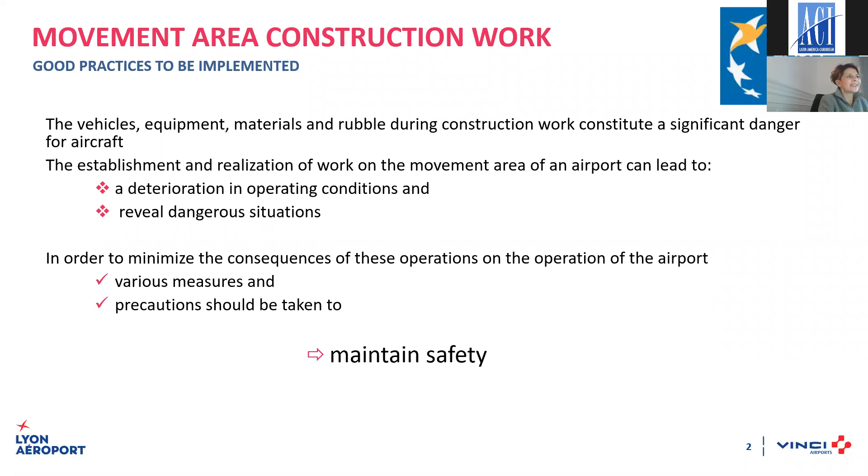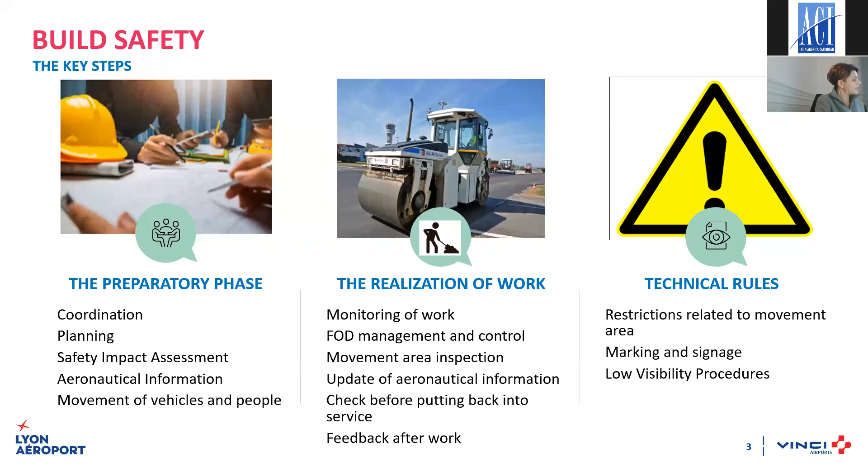So to build safety, it's the next slide. Thank you. To build safety, we identify different key steps. The first one is the preparatory phase, the realization of work, and taking into account technical rules that we can start to see in detail on the next slides.

Preparatory phase and good practices. The first step is the coordination. Good coordination between organizations upstream of the work is necessary when work impacts the operation of the airport and the working methods of the air navigation service provider. This coordination facilitates the processing of the safety file by the supervisory authority. Coordination is based on notification, monitoring, and acceptance of the work by the safety manager, also for routine maintenance operations, and the authority. Coordination between the airport operator and the air navigation service provider.

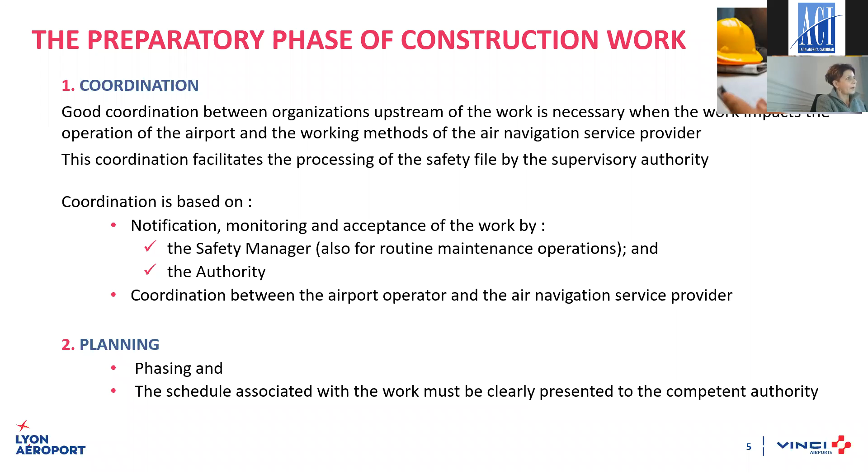The second step is the planning: the phasing and schedule associated with the work must be clearly presented to the competent authority. Then, the safety study demonstrates the knowledge and control of the impact on safety. It must be conclusive on the acceptability or not of the identified risks with regard to the risk reduction measures proposed, and decisive on the implementation or not of the change in view of the conclusion of the safety study, including especially the feared events of greatest concern.

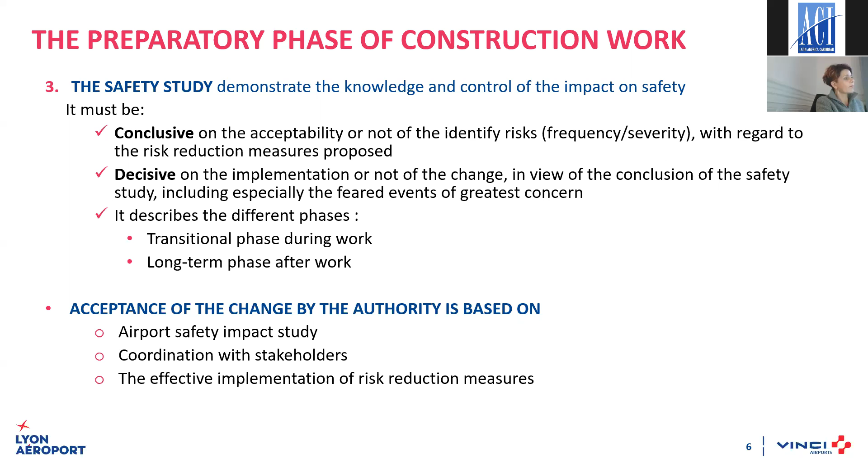It describes the different phases during works and after works. The acceptance of the change by the authority is based on the airport safety impact study, coordination with stakeholders, and the effective implementation of risk reduction measures. You can turn the slide. Thank you.

At Lyon, we have to observe at least 2 months before to send the notification for approval to the authority before starting anything. Sometimes it's very complicated. And for the air navigation, it's at least 4 months before.

We also have the aeronautical information to take care of. At Lyon, we are subject to EASA regulation, and we are the aeronautical data provider who creates or requests the creation of aeronautical information concerning the airport. Compliance with the coordination protocol must be rigorous to ensure real-time accuracy, particularly in the following cases: the work affects the approach and landing instruments, the work modifies the declared runway length and/or distances, in the event of a total closure of a runway or taxiway, or when setting up a temporary offset threshold.

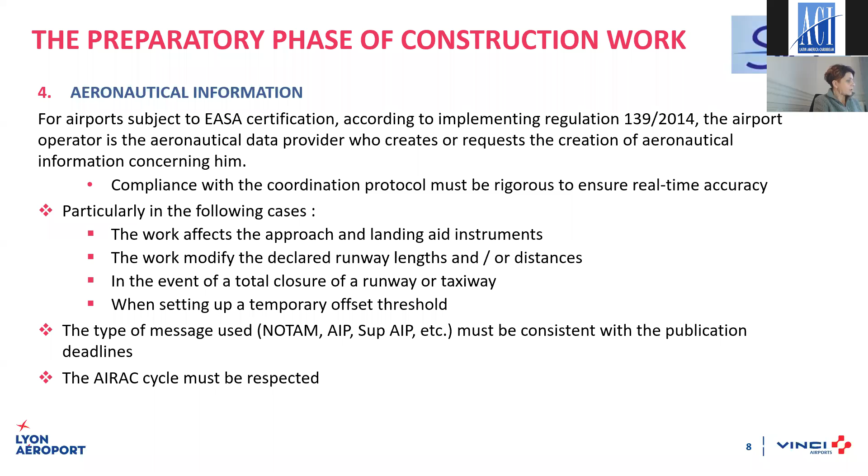The type of messages used, NOTAM, AIP, etc., must be consistent with the publication deadline, and then the AIRAC cycle must be respected. It's around 3 months.

We also take care of the movement of vehicles and personnel, and we implement different access controls. The first one, access control for vehicles and personnel, to prevent, of course, any unauthorized entry to the airport platform. The access permits are to be anticipated and planned before work. We implement access to the work area, also traffic rules on the ground and communication.

Staff are trained to drive airside and receive permission, on vehicle traffic rules on the apron and maneuvering area, and on communication between the driver and the air navigation service provider. Otherwise, they must be accompanied at all times by qualified personnel. And for parking areas and vehicle use, we have mapping. Mapping is developed to limit access to defined areas that are reported and marked.

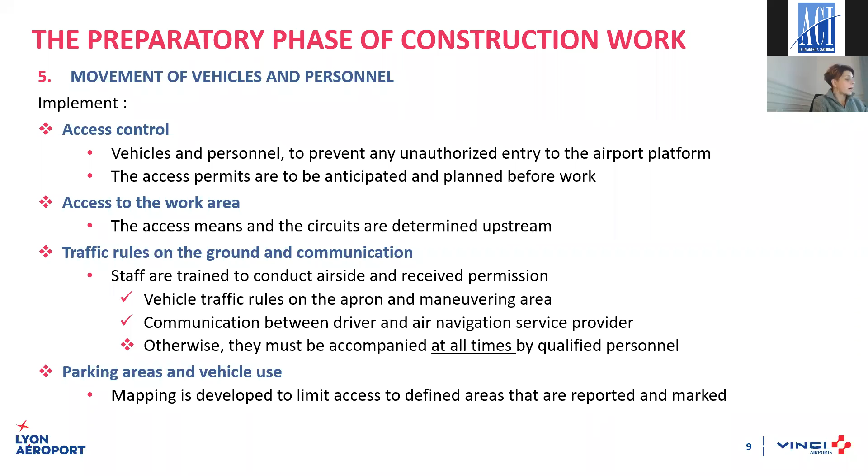This was the first part regarding the preparation, and the second step is the realization of work. During this step, we start with the monitoring of work. The airport operator is responsible at Lyon Airport for the smooth running of the work for which it is responsible.

We ensure regular inspection of the progress of work, check that the safety measures, procedures and standards are respected, and in the event of an incident regarding degradation of infrastructure or equipment, we have to immediately report to the department concerned for the implementation of corrective measures and notify it to the authority.

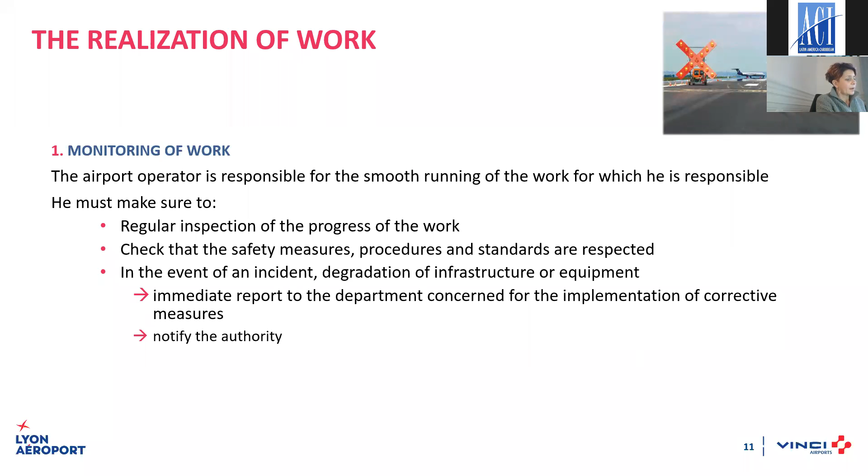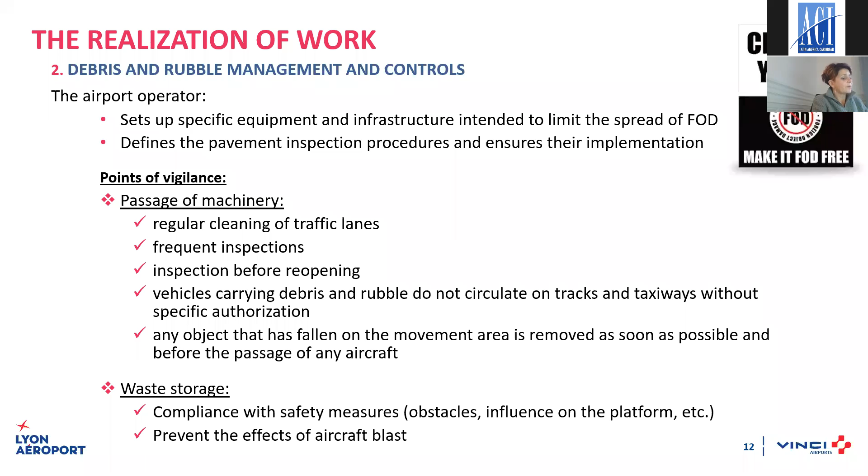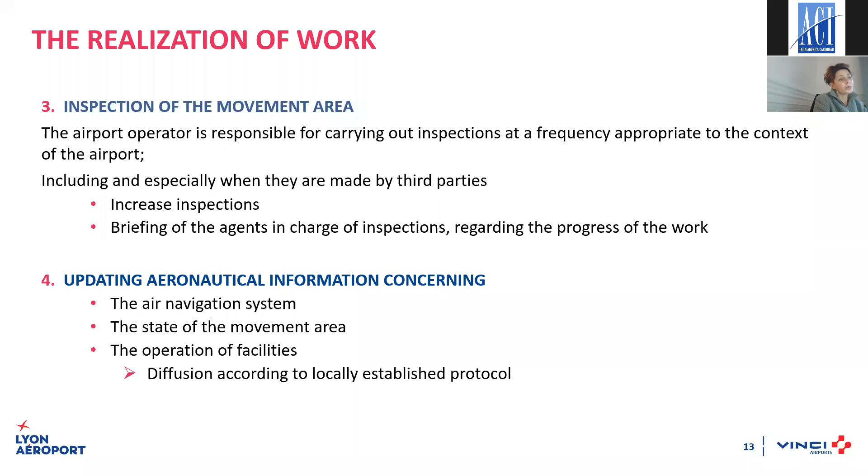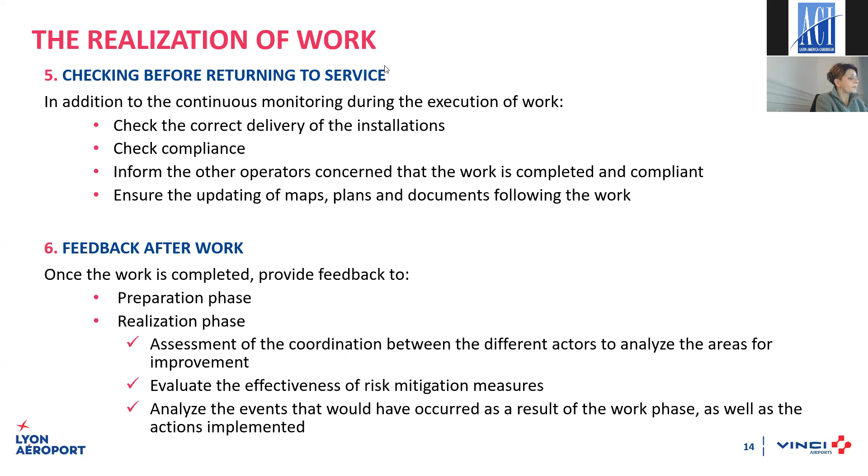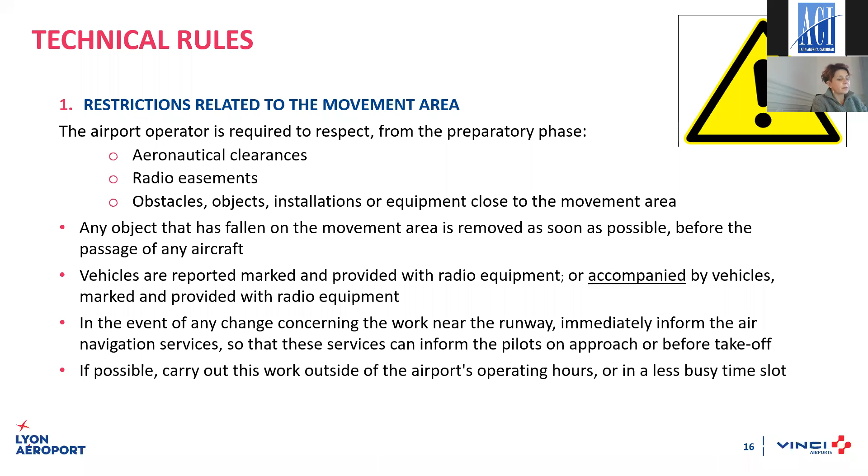In the event of any change concerning the work near the runway, immediately inform the air navigation service so that the services can inform the pilots on approach or before takeoff. If possible, carry out this work outside of the airport's operating hours or in a less busy time slot. Marking and signaling: the signaling of the work zone by way of marking and signage is an important point to consider when carrying out the work. Prohibition signs, barriers, lights on unusable areas.

I think it's not the right slide on the screen. Yes. We should be at page 17. Sorry, number 17. Thank you. Perfect. Yes, it's my fault. It's the right slide. Thank you.

So, work near the end of the runway. Check that no machine, material, or storage of rubble pierces the landing and takeoff surfaces. Respect the marking and signage instructions. Update aeronautical information. During work near traffic lanes, strictly respect the regulatory distances.

During work near air navigation aids, compliance with radio easements, meteorological equipment and visual aids. Evaluate the impact of the work on the proper functioning of these aids. And in the event of a temporary displaced threshold or runway reduction, stop or adapt visual aids to avoid any false indication.

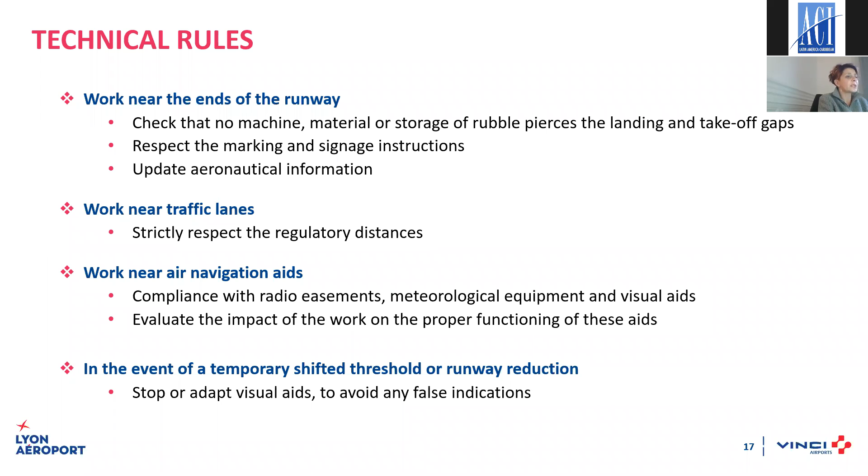During low visibility conditions, limit movement on the ground as much as possible. Clear sensitive and critical areas of the ILS. Stop all construction works. Clear the maneuvering area of any personnel, material, vehicles, or equipment related to the work, and do not carry out any work on the electrical circuit.

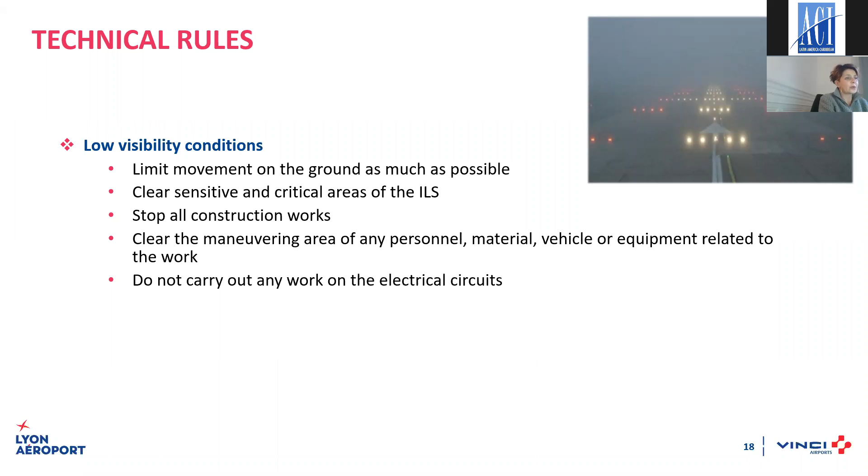Regarding marking and signaling, the signaling of the work zone by way of marking and signage is an important point to consider when carrying out the work: prohibition signs, barriers, lights in unusable areas at main intersections.

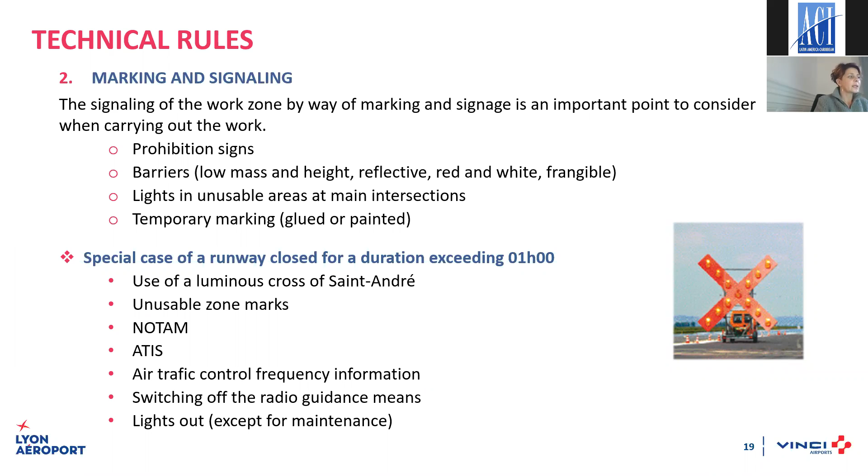Temporary marking, like glued or paint. A special case is a runway closed for a duration exceeding 1 hour, where we have to use a luminous cross of Saint-André, unusable zone marks, NOTAMs, ATIS, air traffic control frequency information, switching off the radio guidance means, and lights out, except for maintenance.

It's the end of this presentation. I would like to thank you, and I will be glad to answer your questions at the end. Thank you.

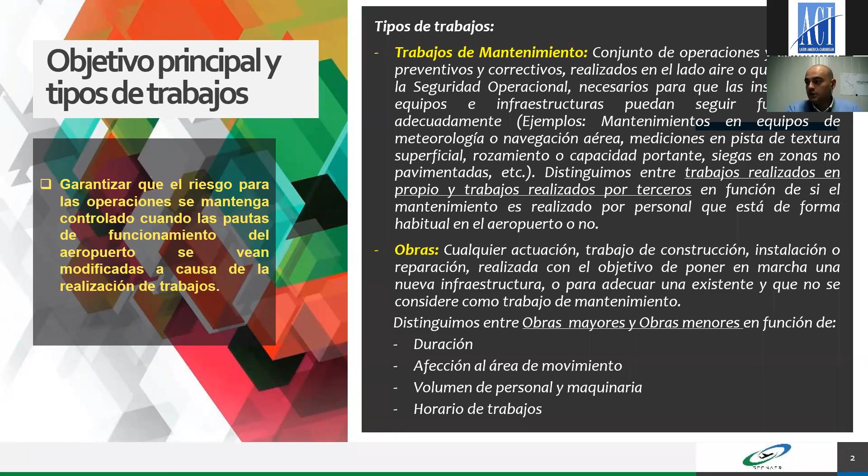On the other hand, we have the other group of works: construction works, installations, repairs, in order to run infrastructure or adapt current infrastructure, which is not considered maintenance. So in these works, we have major and minor works depending on the volume of personnel and machinery involved and the schedules they're carried out.

The main document for operational safety during the works, we call it the Surveillance Operational Safety Plan. This is the document that establishes the acceptable means for complying with the requirements that must be guaranteed when we carry out work on the airside or that affects operational safety at the airports.

The main demanded requirements contemplated in the Surveillance Operational Safety Plan are locating the works and how we access them, possible problems to operational safety, radio communications to be used, and possible incidents that could happen during the work.

The training to personnel that would be working at the airport, a series of KPI indicators, operational safety indicators to measure performance of the works with operational safety, and how we control external operators or possible outsourcing, how we ensure proper follow-up of operational safety and requirements for persons responsible for all this follow-up.

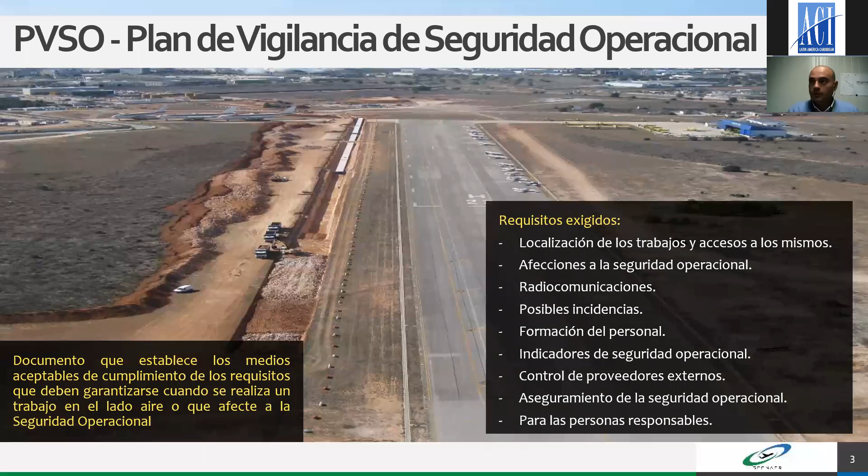The possible incidents are: we need to remove obstacles on the runways or critical and sensitive areas, or we might have foreign elements. Possible problems also on the runways, or we must look into possible problems within meteorological areas or at the taxiways of the airlines.

Possible problems in fuel areas or maneuvers of aircraft during the scale times. We must also take measures to carry out works with adverse meteorological conditions or low visibility. We also revise whether the work can affect a specific facility. Taking into account these possible problems, we determine whether we need to do notification. This is how we handle operational safety during maintenance work and how we revise possible problems that they could cause.

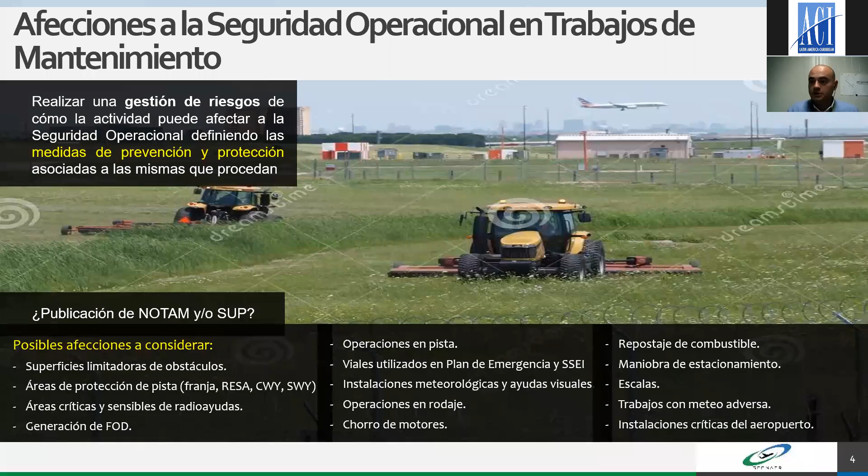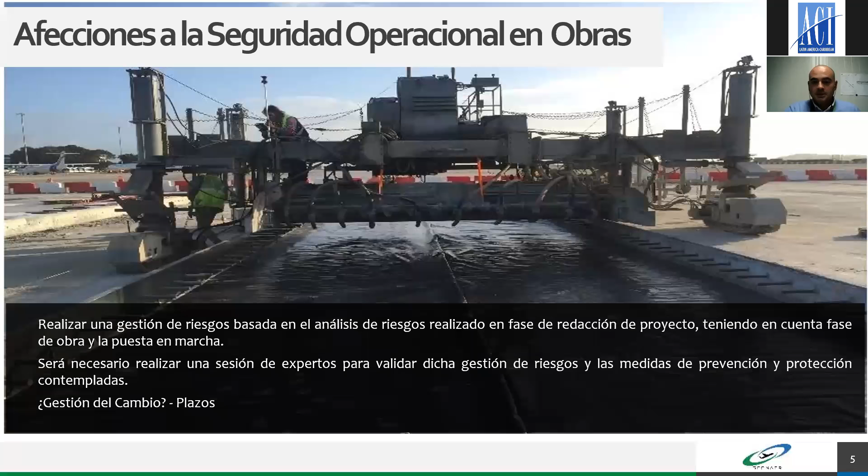During risk management, we need to discuss this with experts to make sure that prevention and protection measures contemplated in our risk management are proper and acceptable to everyone. Another aspect to take into account to manage possible problems during works is we need to be ready for changes, and if we need changes, we need to be authorized by our aeronautical authorities. I think Monia mentioned this in a previous webinar, so I will not delve too long on this, so we go on to the next slide.

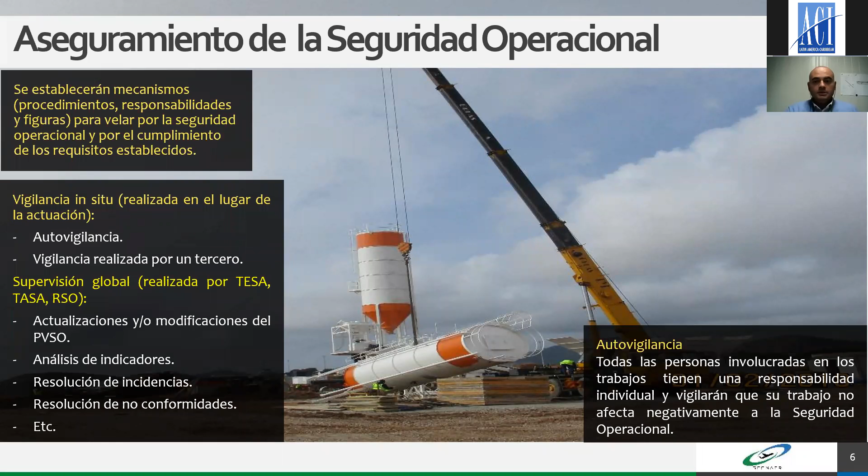In the case of maintenance works, the way to ensure operational safety will be through surveillance on site with auto surveillance. We have a checklist to make sure that we have followed all proper measures in every zone or area. And in regard to global supervision and maintenance work, the person in charge of operational safety is in charge of this, and people at the airports must do the global supervision.

And additionally, we can have supervisions according to operational safety aspects.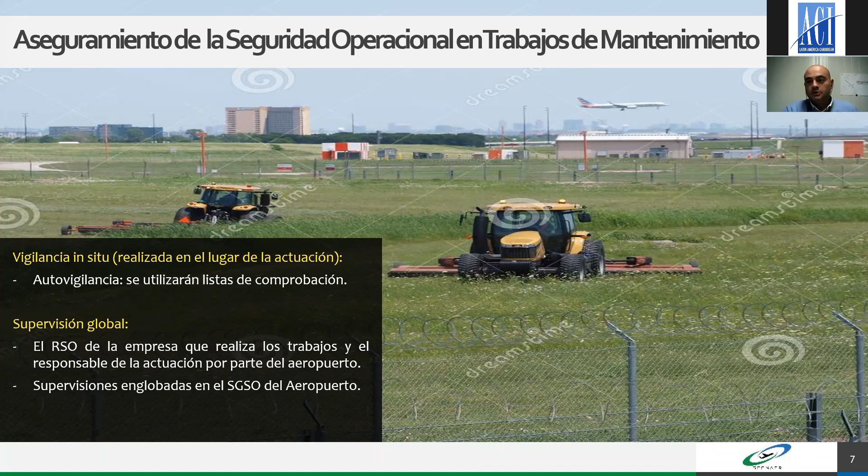In the case of major works, ensuring operational safety is done differently. In this case, on site, we have auto surveillance done by each one of the persons that is working. Additionally, the supervision from the person in charge of aeronautical safety, who must follow up on operational safety by the outsourced company in charge of the works.

We must also take into account elaborating the surveillance operational safety plan to establish a revision plan with a calendar of visits to the works and to test the aspects we must monitor or surveil in each area. Additionally, we also carry out surveillance by a third party.

In this case, the third party is, what in South America we call interventors. In Spain, we call them technical assistances of work controls. We appoint an auditor who audits this work, and we also avail an inspection program for the work that will be done by this TASA institution.

In regard to global supervision, they look into all documents, and all major works are carried out by TESA and TASA and responsible parties at the airport. And additionally, like with maintenance, there could be global supervision with operational safety at the airport.

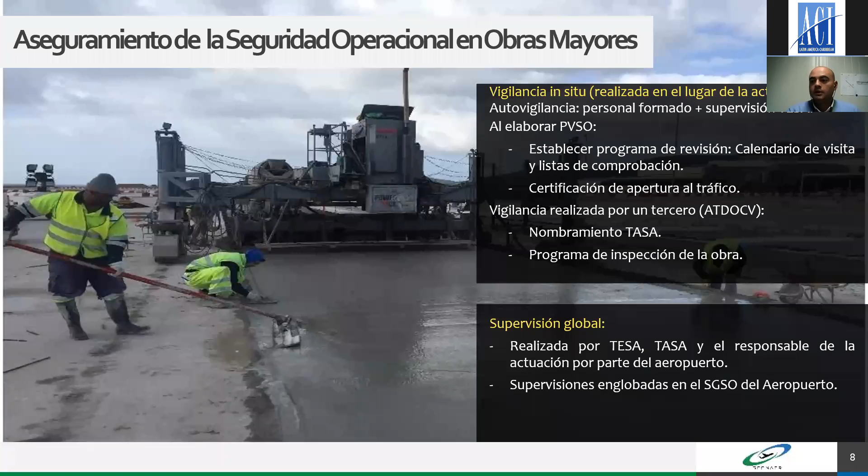In the case of minor works, to ensure the quality, the surveillance is done on site, in this case by trained staff in TESA. In general, it's fairly similar to major works, but the difference is that in this case, we don't usually have supervision with a third party. And if there is, it's normally from the airport and not an external engineering company.

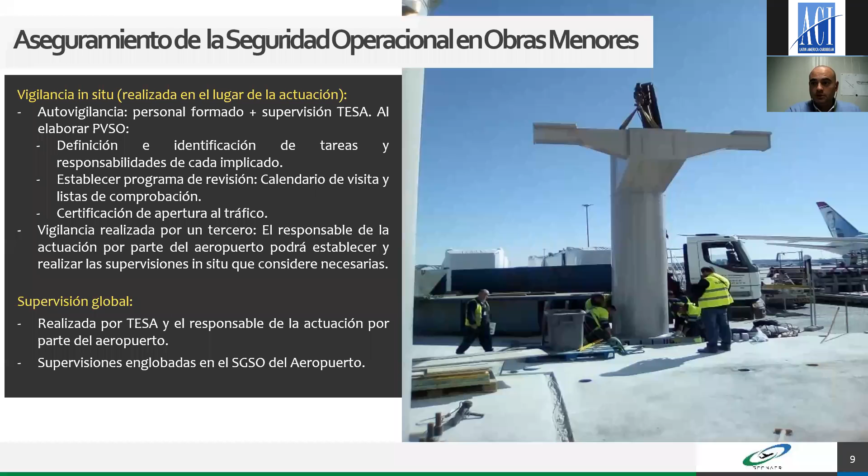We will also have global supervision. In this case, it's done by TESA and by the responsible person at the airport. And it's also possible that there are global supervisions and operational safety supervision of the process.

In this slide, I explain the requirements of the responsible persons for operational safety and what are the responsibilities of each one of them. In the case of maintenance works, the main figures here are the airport operator with the external actors. This is a person that belongs to the airport who's assigned to follow up on the activities that the external person will do in the airport and to make sure all operational safety requirements are complied with. The other important figure in maintenance work is responsible for operational safety. It's a person that belongs to the external consultant, and they will make sure of operational safety aspects, and they will be involved in the communications aspects. And in case of the works, the responsible persons and responsibilities are different.

The responsible for operational safety in this case is TESA. It will be a technical person from the construction company, previously approved by the director of the airport. He will have full authority on the personnel or staff. If there's an event, he can stop work immediately. To be appointed technical person for operational safety, you must count with aeronautical experience. Once the work is being developed, he must be available at all times, and depending on the work, he must be at the airport every day.

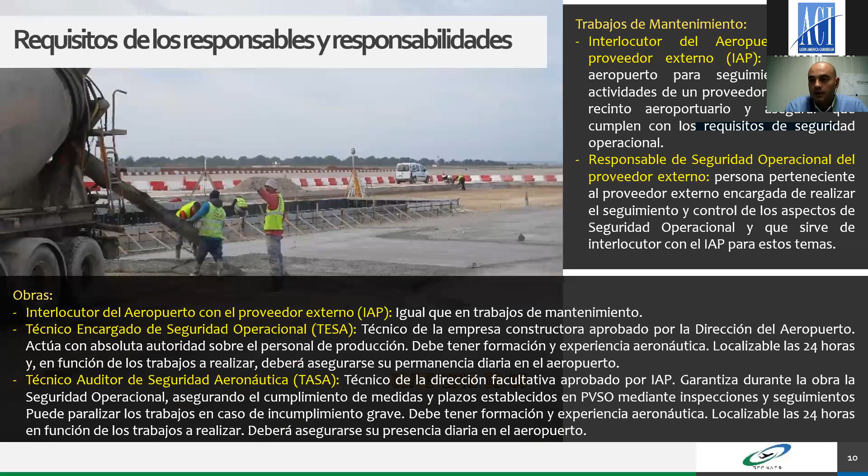Well, thank you, that's my presentation. Thank you very much for your attention. It'll be a pleasure to respond to any questions you want to ask. Thank you.

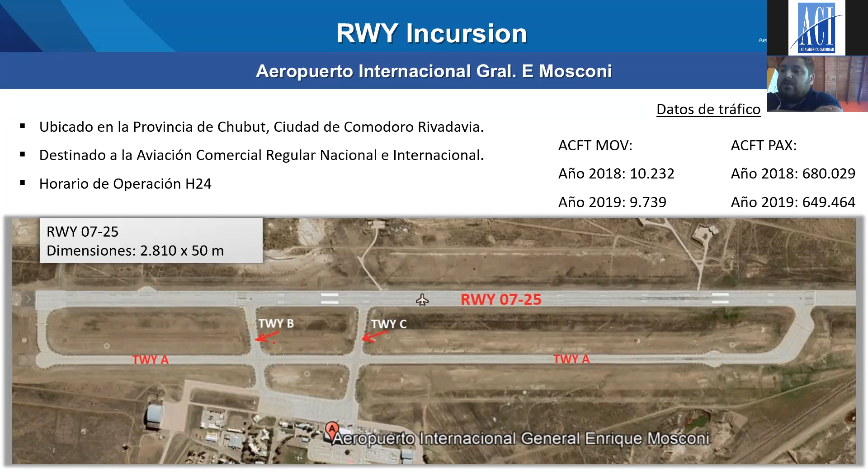Together with the aeronautical works, we developed work stages, 7 stages actually. The first one included displacement of the threshold. It has an orientation of 07-25. The threshold would be displaced by 750 meters, so we could work on the 07 runway, and then adjust the Alpha taxiway to be used as the runway.

The idea to keep the airport in operation was that, while we were repaving the main runway, we could use the taxiway as a runway during the works. The main runway has 50 meters in width; the taxiway width is 40 meters. To be able to use this taxiway as a runway, the first thing we saw was that the friction of the surface was at the limit of what was acceptable. Thereby, in order to improve the operational standard, we decided to... all the surface is concrete.

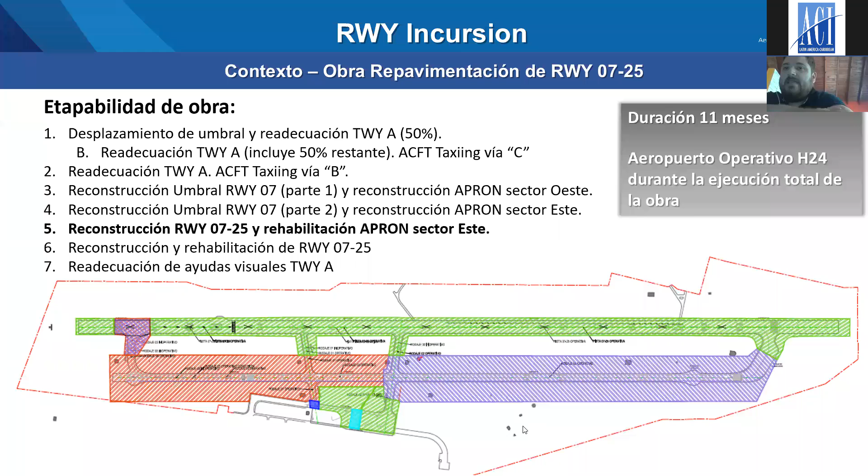This work took approximately 11 months; we started in the first days of January to end at the end of December. Duration 11 months, January to December. We took additional measures here. We issued operational safety bulletins. We used the example of the airport of Montevideo, Uruguay, and we adapted their work methodology. And we started to produce these bulletins and sent them to the airlines.

In the first stage, this is what you see here, the first bulletin. You can see in the pinkish area where the areas are penalized at the airport. The objective of this bulletin is to inform pilots and airlines in a simple and quick manner how the movement area of the airport is configured. The truth is, we found this to be a very useful tool, and the airlines received it with open arms. It's very useful for the pilots since they immediately understand how the airport is configured.

What you see here is stage one. As I said, about half of the Alpha taxiway was penalized, and we started using the 07 taxiway. You can see here in white, after threshold 07, a security area we left as a buffer between the aircraft and the work area.

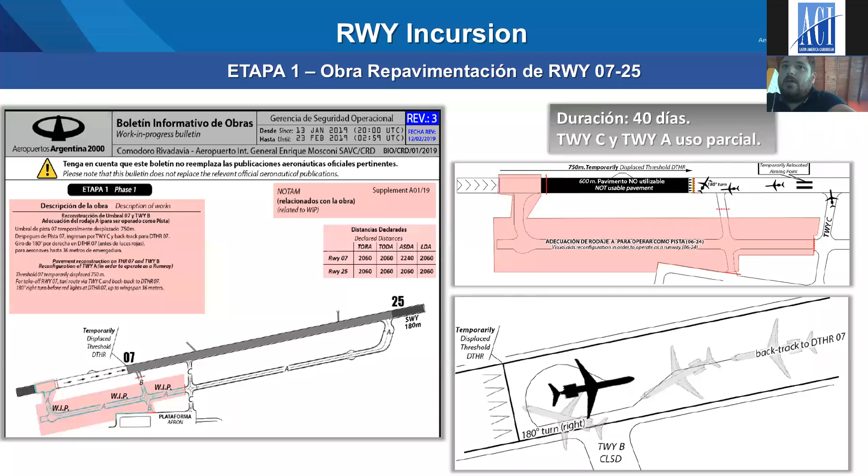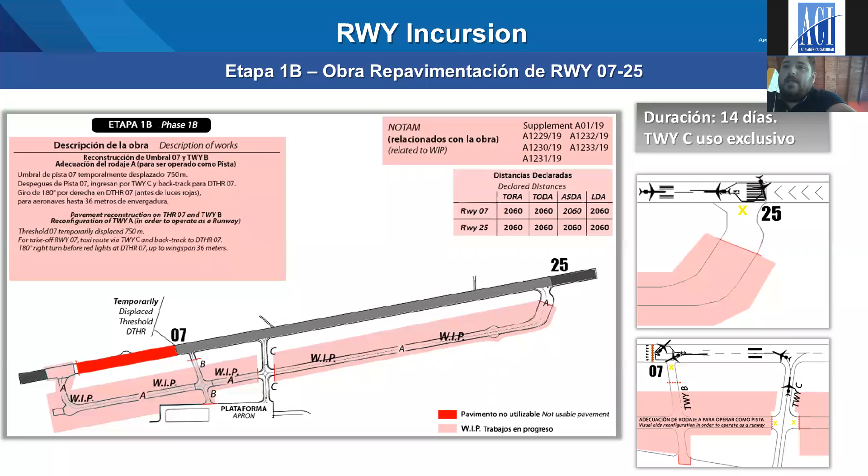In the second stage, we started to work on the second half of the Alpha taxiway, enabling only Charlie so airlines could land. In the second stage, we enabled Bravo so it could be used together with the runway. You see a part in red, which is the security area between the beginning of threshold 07 and runway 25. We had to mark it red because of some events we had, which I will mention later on.

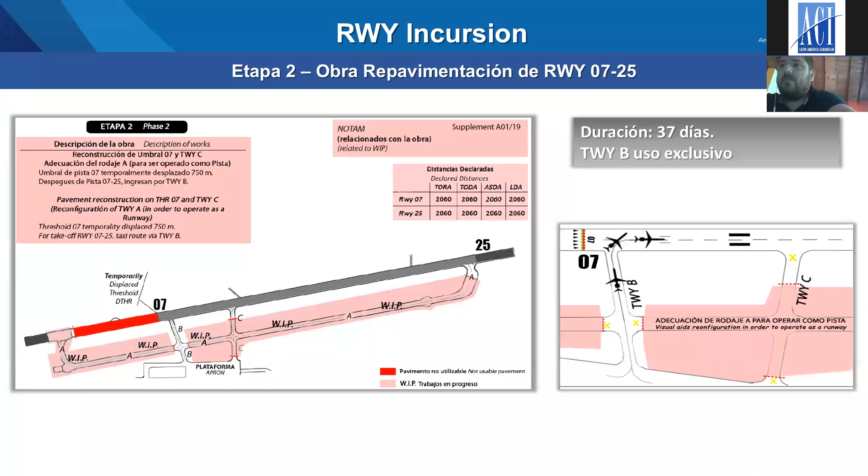In this stage, you can see we started to have a sort of overlapping of work. The original idea was that the works would not affect more than one subsystem of the movement area of the airport. So we had to attack one part of the runway, the taxiway, and then go to the apron in two sectors, and once we finished with the apron, the runway. But the reality is that we could not comply with the timeframes for different reasons. The stages overlapped with each other, and while we were working on the runway, we were also working on the apron.

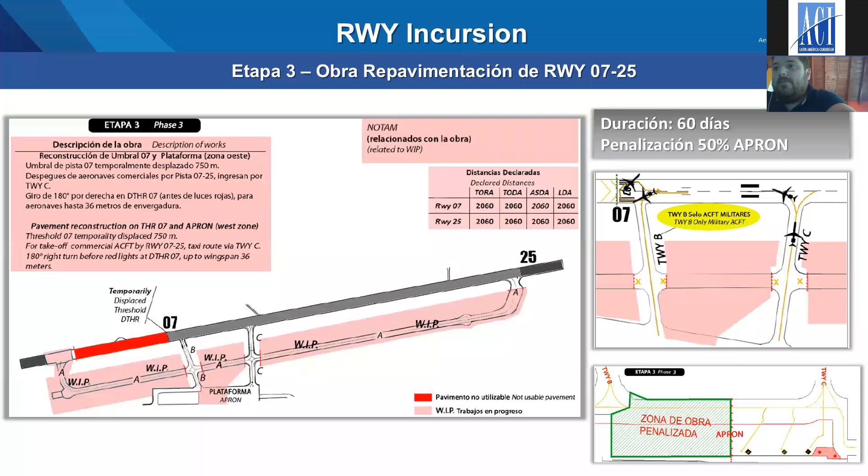Here, in this stage, we continued working in the taxiway. We had attacked work in the other half of the apron, always being careful with security in the operation, which was in operation always.

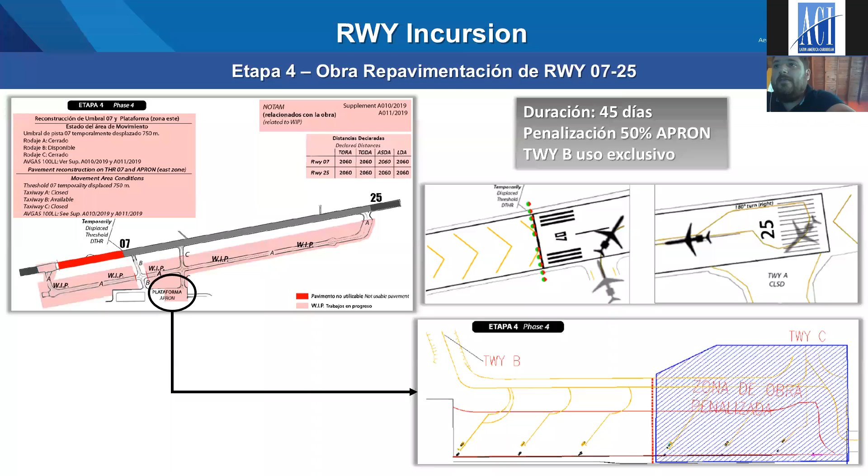Here, in this fifth stage, we started with repaving of the runway, and we started to use the parallel taxiway as a runway. We emphasized here a lot that runway 07-25 was closed. In this bulletin, very briefly, you can see the operational conditions of the airport. This information, although it's not official, is produced by the aerodrome operator in Argentina. The official information is done by civil aviation.

We understood that this tool was very useful, though, to better inform the pilots, so the pilots would have more information about the movement areas, and so we could prevent approximations to runways that were closed or to work areas where aircraft should not come close.

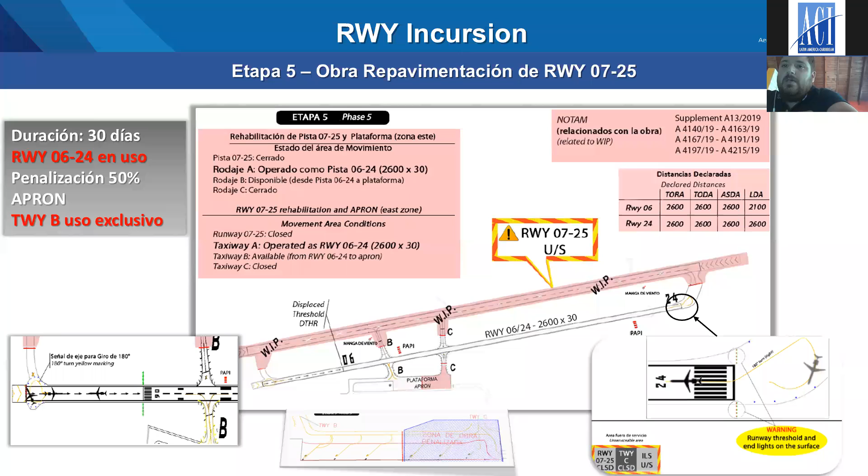After this, in stage 6, readaptation or readjustment of the runway, we started to produce new visual aids on runway 07-25. We always kept the runway closed. Besides the NOTAMs, we included the white crosses for closing the runway. We also included them to prevent confusions, so that the aircraft would not come close to a closed runway.

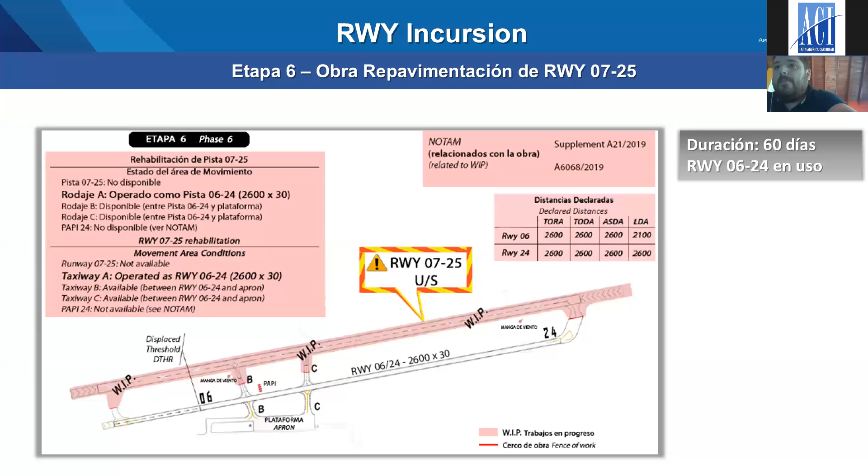Now, in this last stage, runway 07 was enabled totally. There was a small change with the original. And we had Charlie taxiway enabled. Meanwhile, we were working in the readaptation of the parallel taxiway that we were using as a runway. We had to adapt the lighting for the visual aids and so forth. All this work was carried out. Meanwhile, the new 07-25 runway was open.

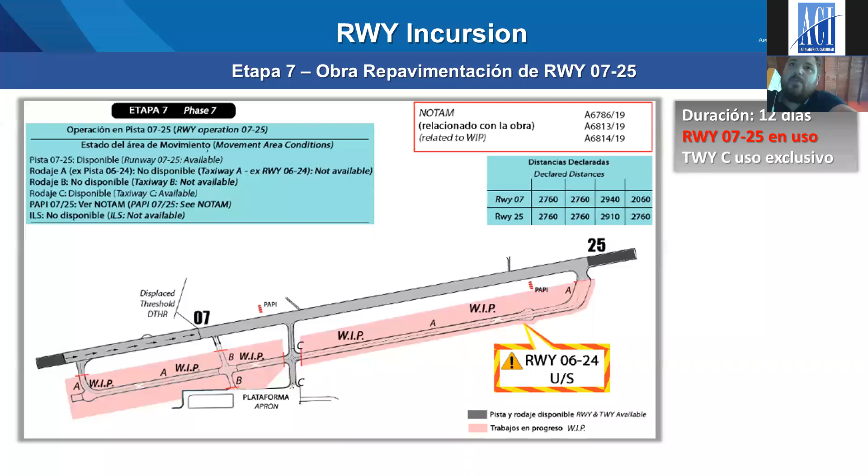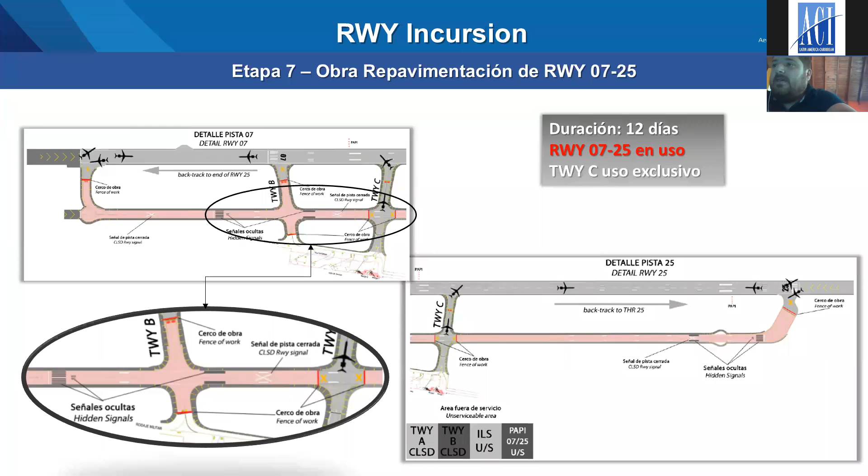You can see some details on the work, where, as you can see, we had to mark the old Alpha taxiway that we used as a runway with white crosses to prevent confusions. Well, this is a bit of all the work that we did during the repavement.

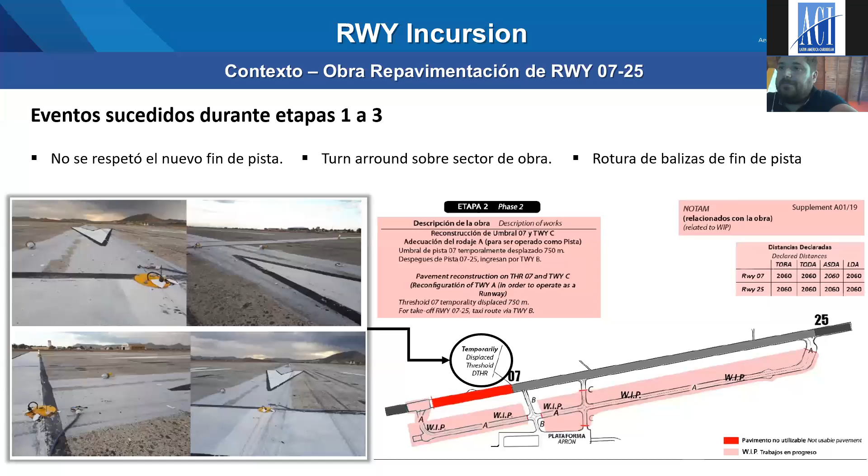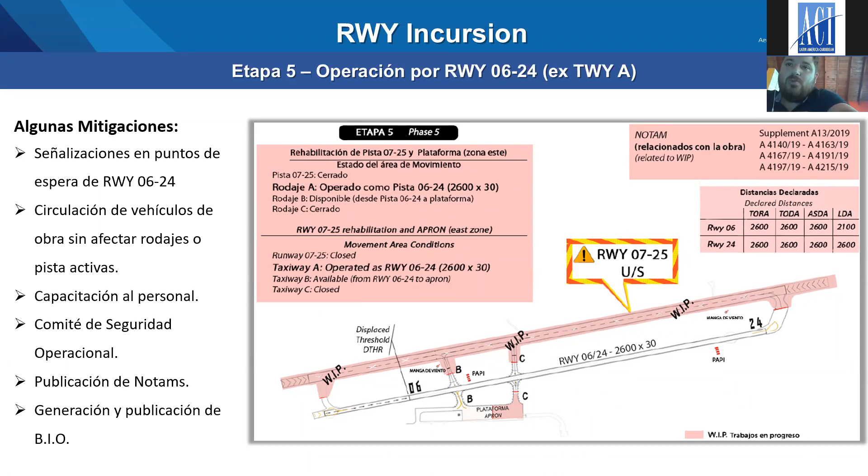As I was saying, during the 5th stage, we were working in repaving the runway, and at the same time we were working in the apron, and the communication pathways between the different runways were being used for the works. And on August 8, 2019, we had a runway incursion. A work vehicle crossed from taxiway Charlie, from the works sector, to the repavement area of the platform, right at the moment when an Embraer was taking off. The event was categorized by the Supervision Board as a Class A incursion, which is the most serious of all.

Well, we had to go back to the work methodology. We had to reinforce communication with the work personnel. We had to reinforce communications with the tower. We had to raise awareness with the work staff at the airport. It's not just a common work area. So we had to move staff from the corporate headquarters to reinforce all these measures because of this important situation.

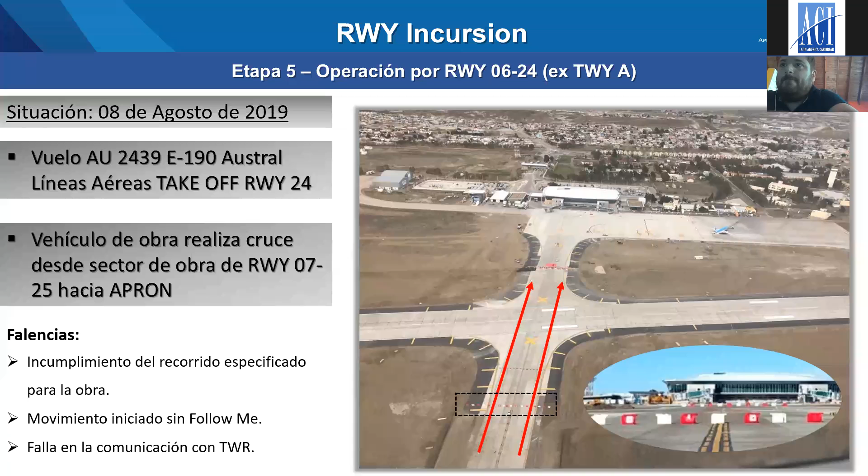The vehicle got in touch with the tower. They misinterpreted the message of the tower. They understood they could cross, and they were told they should wait, but the vehicle should not have been there, and the tower should have told them not to cross. But this happened, and we were fortunate, and there were no serious consequences. This is a bit the experience I wanted to mention.

And last, what I wanted to mention, learn lessons from this work or this serious event. Always, we need to improve training of our staff, devote as much time as possible to training personnel. We must understand that many people that work at the airports are not used to working at airports, and it's not a normal work area.

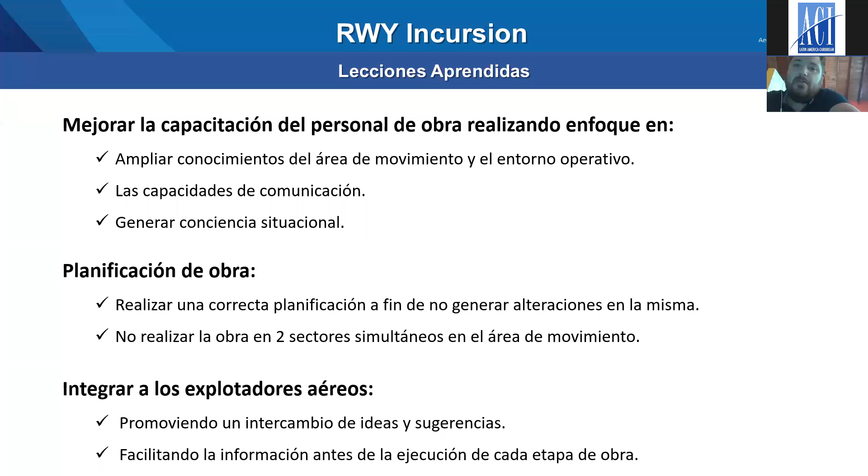Well, we need to prevent these types of serious situations. These were the problems we had basically, and in general terms, we worked fairly well. And working with all stakeholders facilitated our work and this work methodology, basically. Well, this is all on my behalf. I'm open to answer your questions or for your observations.

Thank you, Lucas, for your presentation. As I said before, now briefly, we will go into the Q&A, questions and answers session. For this, please send your questions to the email. We will read some of them briefly because we are against time.